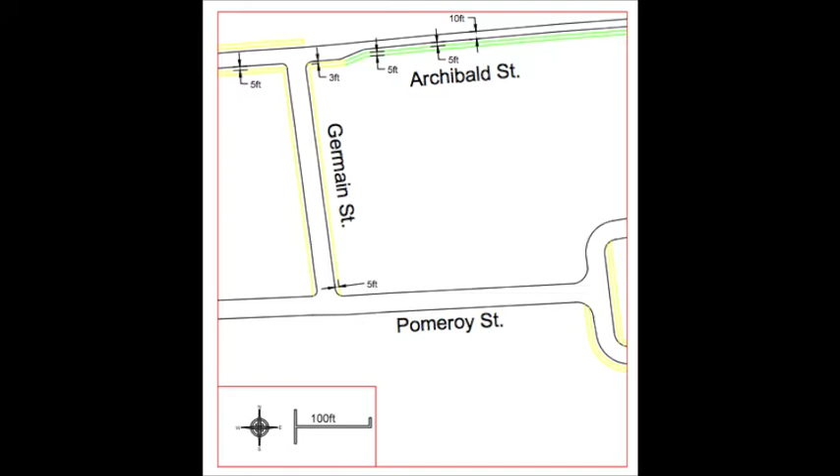Currently on Archibald, a sidewalk extends about 200 feet of the 800-foot block. The first plan is to extend this sidewalk. The sidewalk will continue on the south side of Archibald until it reaches St. Joseph's Home for the Elderly, providing a safe path for those residents. If Archibald is turned into a one-way eastbound street, the sidewalk would extend the entire block on the south side and curl in front of the elderly care facility.

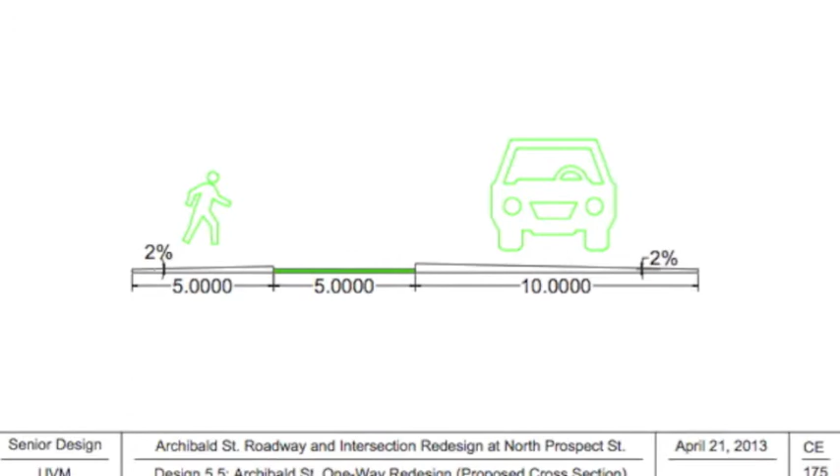Archibald is currently comprised of two 10-foot lanes and no pedestrian sidewalks. Converting Archibald into a one-way street will permit the addition of an ADA-regulated 5-foot sidewalk and 5-foot buffer from the traffic lane. There are two methods for improving visibility.

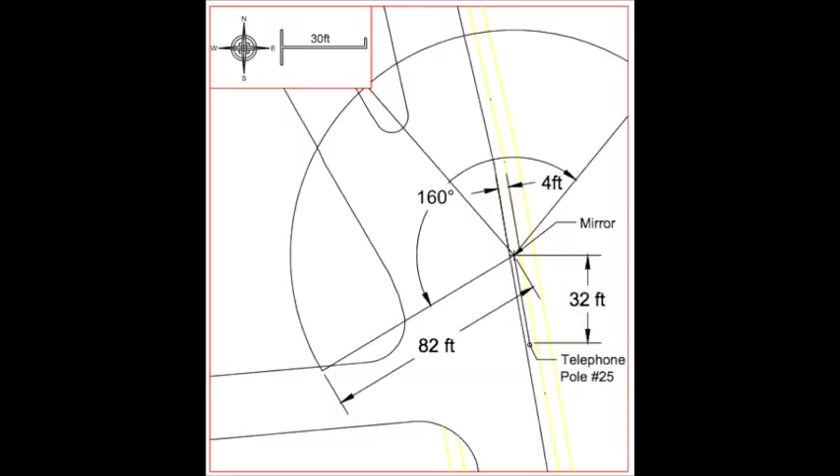The first option is the addition of a mirror across from the mouth of Archibald. The second improvement for visibility is the removal of 8 to 12 inches from the top of the crest of the hill. The mirror will greatly increase the visibility in this intersection. It will have a 900 millimeter diameter with a 160-degree viewing angle.

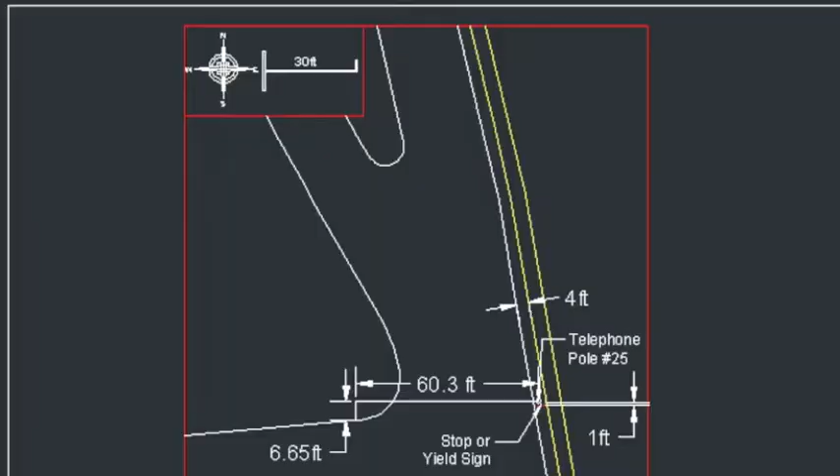Currently, there is no signage for northbound motorists on North Prospect. This leads to issues when motorists quickly cruise through the intersection to make their left turns onto Archibald from North Prospect. Adding a yield or stop sign for northbound travelers would slow traffic and improve the overall safety of the intersection.

An experimental design option for helping the issue of low sight distance on North Prospect would be the implementation of a through-route radar-activated warning system. This system was developed for stop-controlled intersections to reduce accidents occurring from people pulling out in front of through traffic.

If Archibald were kept a two-way street, the system would warn the vehicle users heading north on Prospect making a left-hand turn onto Archibald, as well as vehicles approaching the stop sign on Archibald, looking to head either direction on Prospect. This would involve the installation of a warning sign with an LED light tripped by a Doppler radar at the bottom of the hill of North Prospect Street.

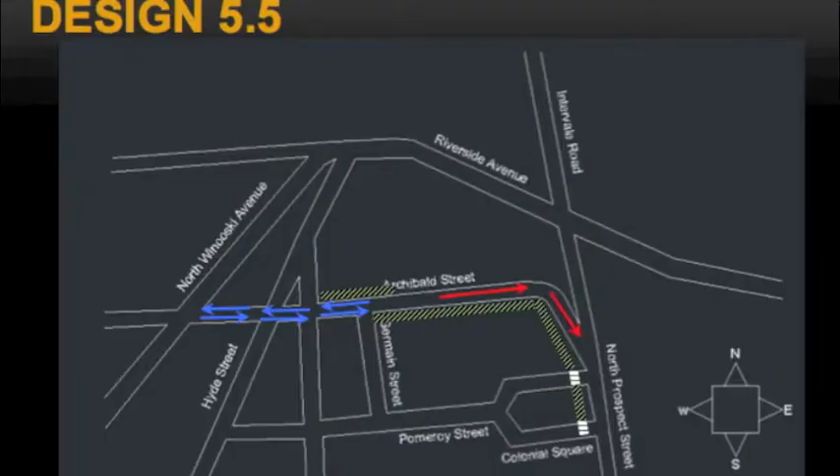Converting Archibald into a one-way eastbound street from Germain Street until North Prospect Street is the most drastic change, but will greatly improve safety. This change will eliminate the dangerous turns onto Archibald that result from visibility issues with the crest of the intersection. Turning the road into a one-way eastbound street will still permit public transportation to utilize the bus stop in front of St. Joseph's Home for the Aged on Archibald, as well as allow residents of Germain Street to access their road from the west side.

To analyze this alteration, traffic counts were performed at the intersection of North Prospect Street and Archibald Street during the morning and evening peak hours to determine which time period would be affected the most by the change. The evening peak hours had the highest amount of vehicles turning onto Archibald from North Prospect Street, so further traffic counts were performed on the surrounding intersections to 1. determine where the vehicles on Archibald would go, and 2. how this change would affect the surrounding intersections.

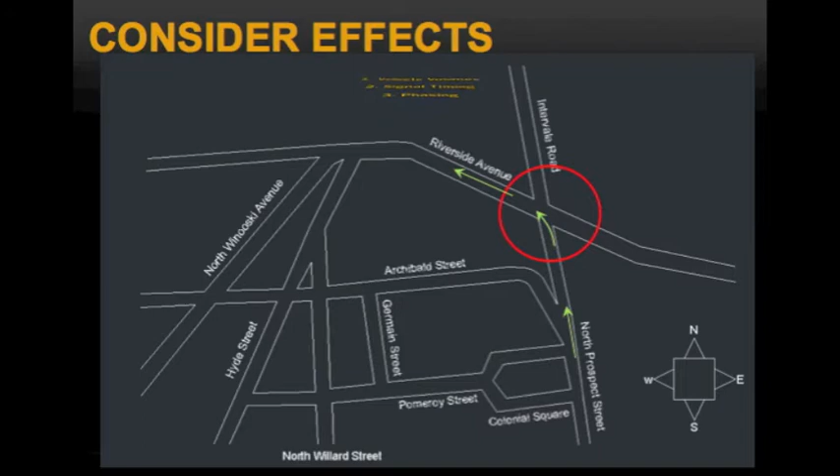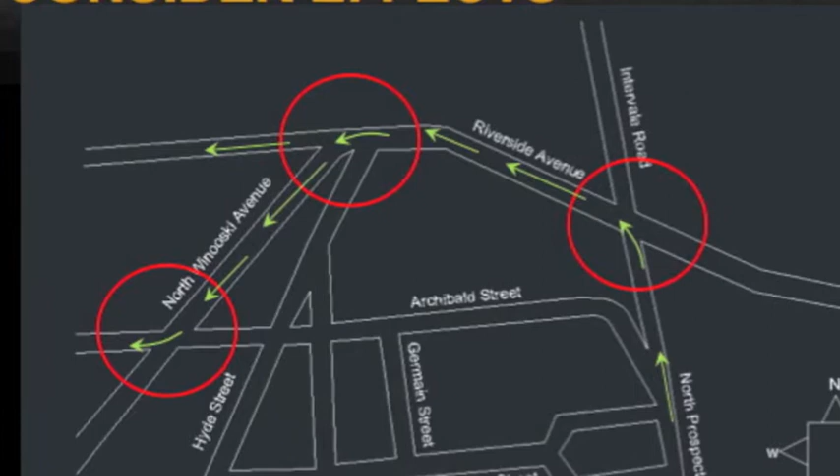Next, analyses of the intersections immediately impacted by this change were performed. Vehicle volumes, signal timing, and phasing were measured during the evening peak hours at the intersections of North Prospect Street, Riverside Avenue, and Intervale Road; Riverside Avenue, North Winooski Avenue, and Hyde Street; and North Winooski Avenue and Archibald Street. These three intersections are the assumed paths for vehicles that were not able to turn left onto Archibald Street from North Prospect Street. Further analysis was required to determine the effects of these changes.

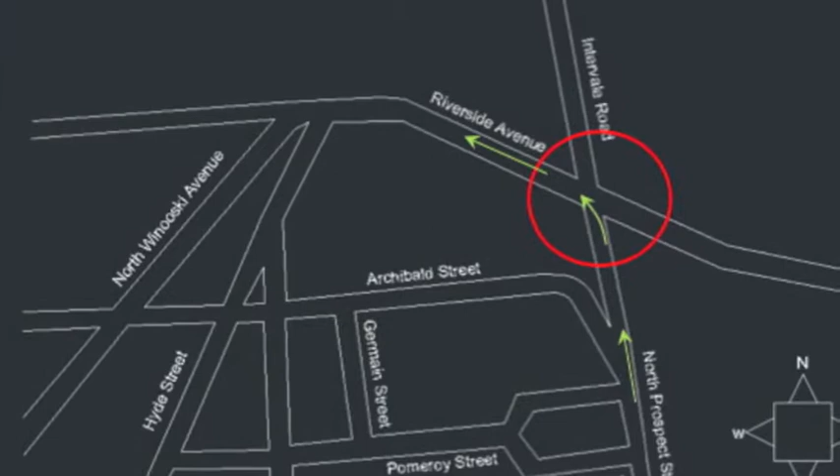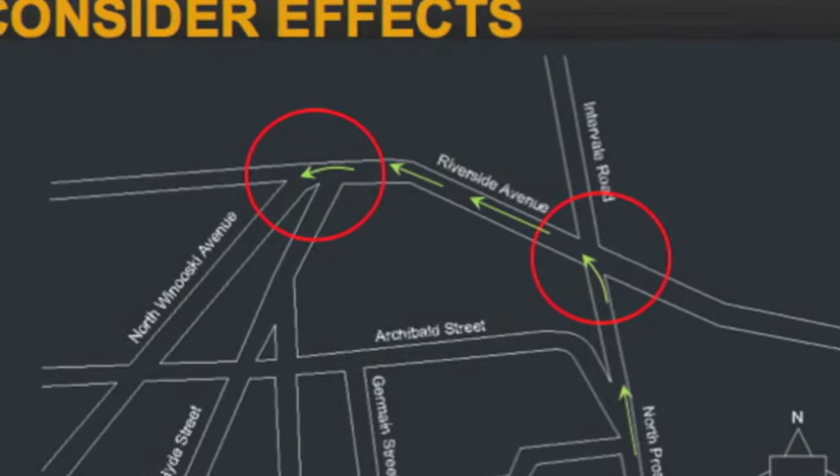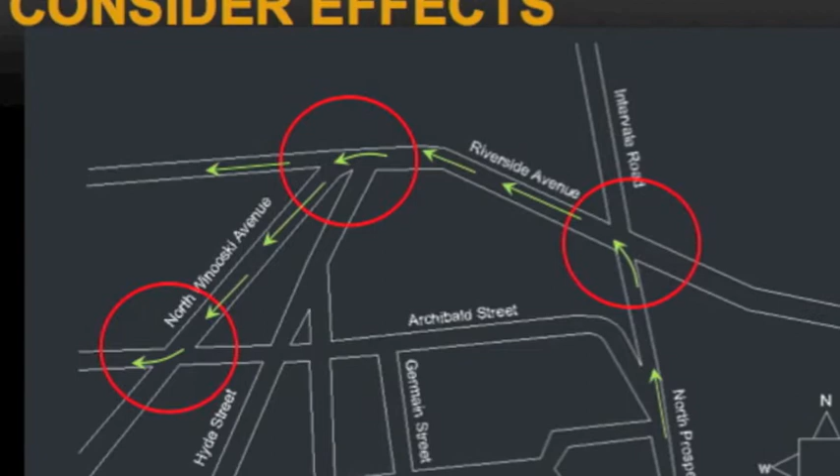The first step is the recalibration of signals with the additional vehicle volumes. The most tremendous effects occur at the intersections along Riverside Avenue. The first one at North Prospect Street calls for an entirely new lagging green phase for the northbound traffic. The next effect is the length of the left turn cycle at the intersection of North Winooski, where extra volume of vehicles adds 5 extra seconds to the current cycle. The signalized intersection at North Winooski and Archibald easily handled the new volumes, and the recalibrated cycle length equaled the current cycle length. The last step is ensuring the level of service remains the same or improves.

Design 5.5, turning Archibald into a one-way eastbound street, is considered the best option. With this option, any turn onto Archibald is eliminated, and head-on collisions are eliminated. Design 5.1 can be implemented at the same time, connecting the north end to downtown Burlington by way of Archibald. In terms of quick and easy changes, Design 5.2, the mirror addition, is the most feasible option. It can be implemented quickly and will greatly improve visibility for all users of the intersection.